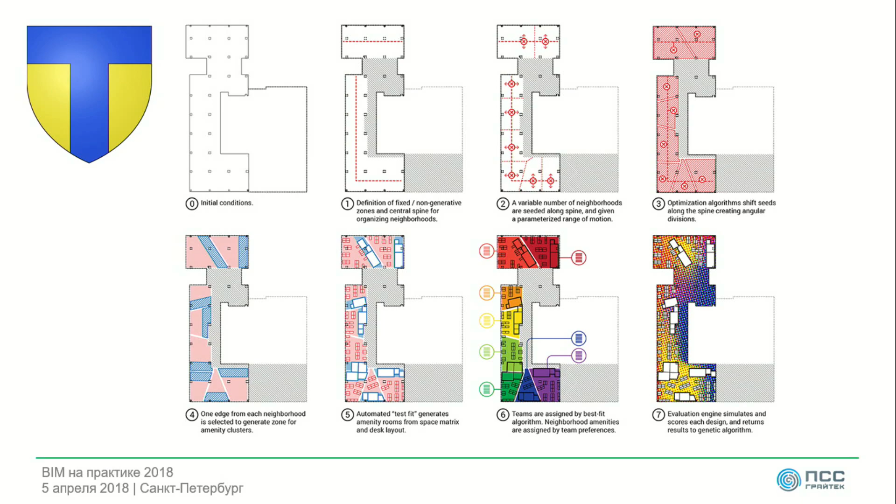Generative design is important in this context. We might have a particular company in Toronto using Autodesk. They use the software to plan the layout of spaces, and they take into account various factors.

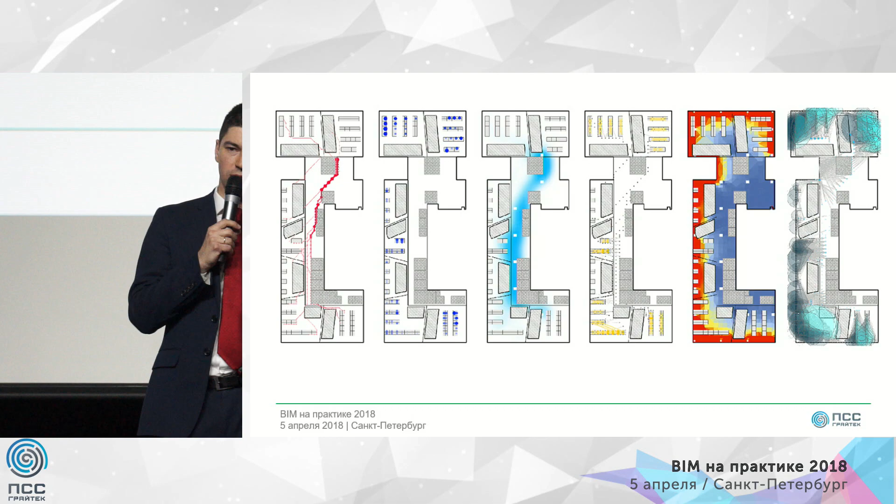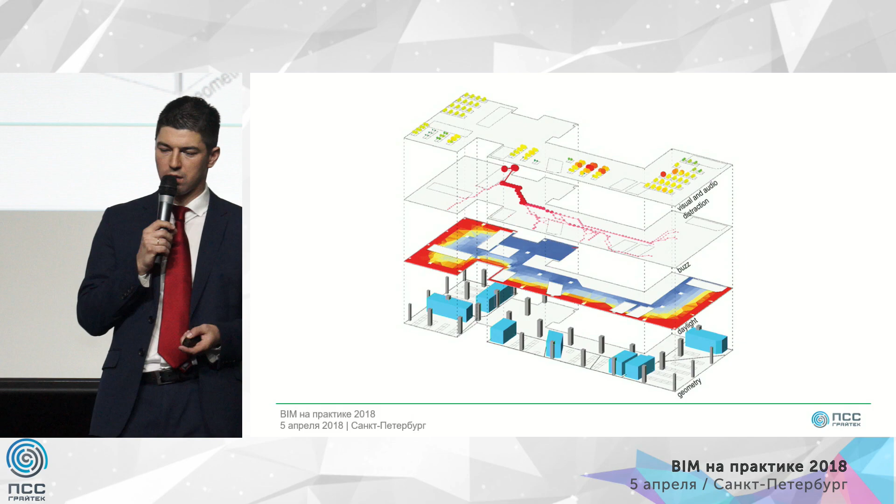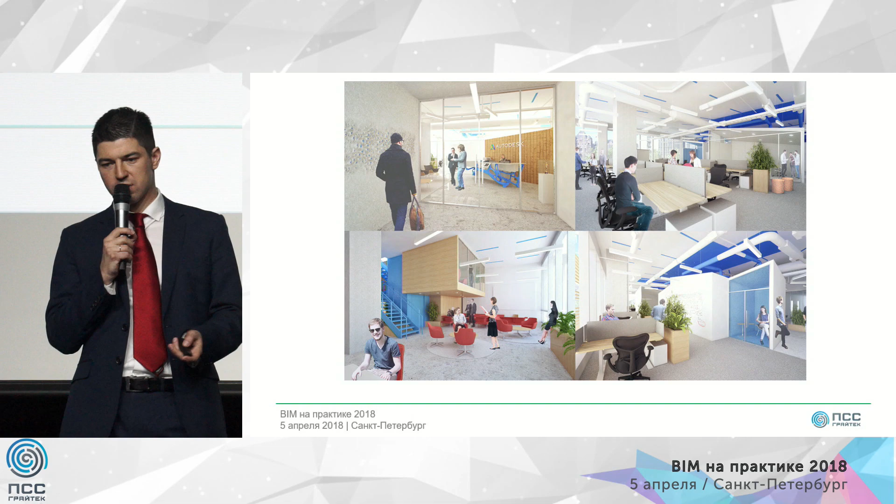To do this: the noise level, the level of lighting, traffic of people, location of people next to each other. So they combine these factors, devised an algorithm implemented by a computer, and the machine selected several thousand options and variants on how this could be addressed. After that, the best scenarios were selected, and in this slide you see a real office that was planned based on the results of this modeling.

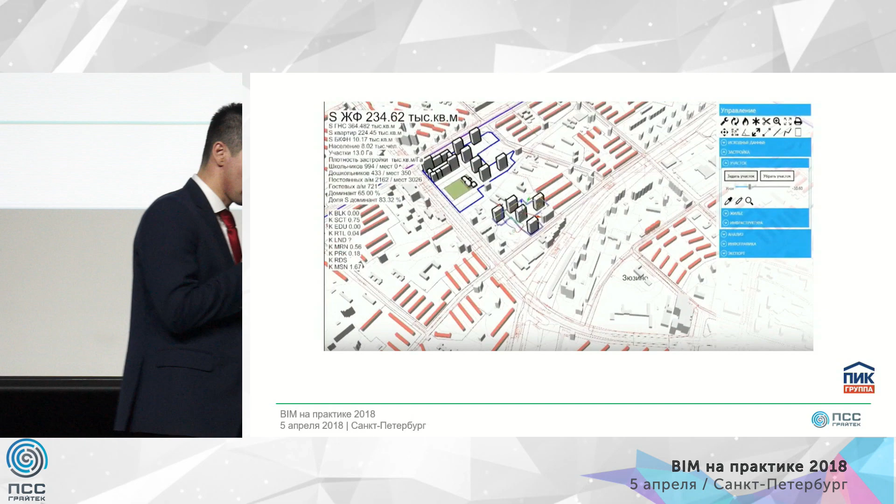In Russia, many think that BIM is not quite well developed, unlike in Great Britain, France and other countries. But in reality, in Russia we do have some very good companies in this field as well. Very often there will be an international contest of projects from our company, and I invite all of you to take part. I really think that many companies have good chances to win this contest.

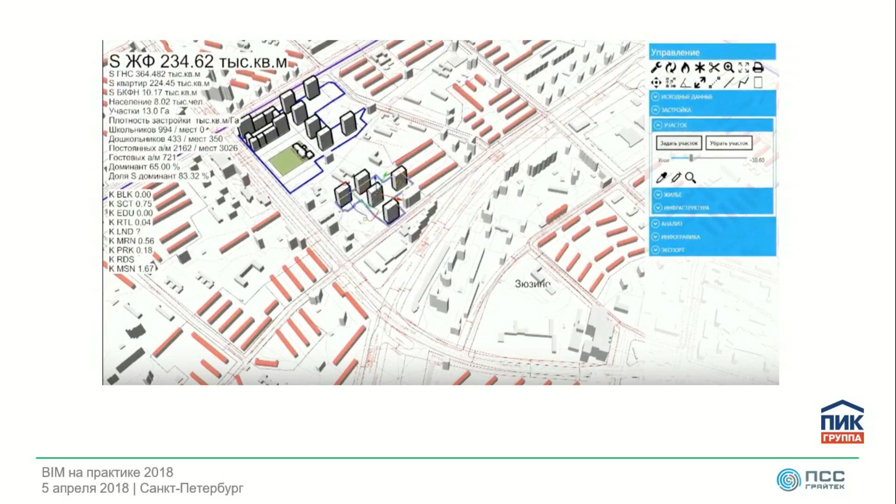In this slide, there is another very good example produced by PIK company. It helps eliminate human labor at the project stage, at the concept stage. After such modeling, designers get automatic models at the concept phase with the necessary detailing, and they can use them in their further work. This video is also available online on YouTube, and you can watch it to understand the procedure.

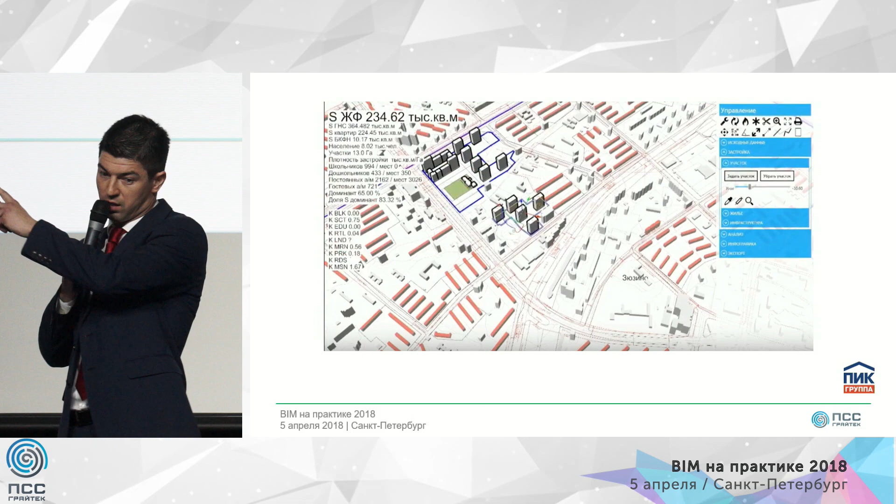There are also time and money savings, and this is a real block, a real district inside Moscow.

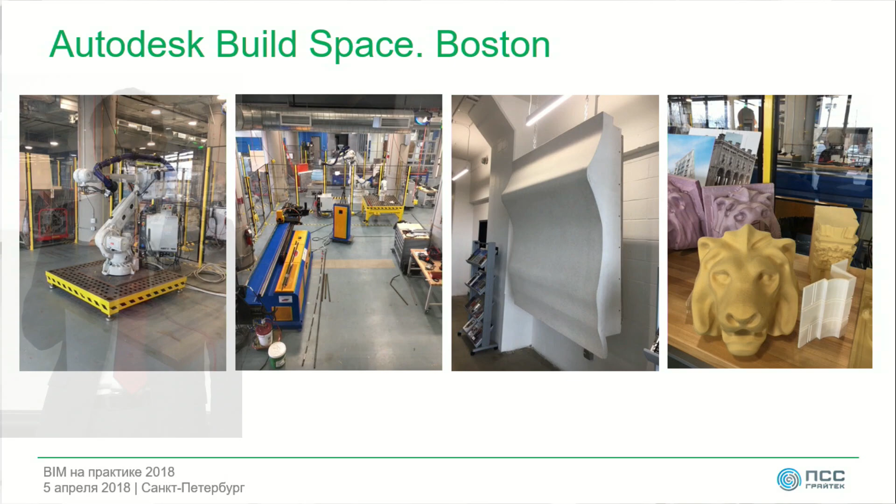I'd also like to tell you that there is an Autodesk build space located in Boston. This is the only facility in the world that has a number of robots, industrial 3D printers, and other types of equipment. All this equipment can be used for free to produce and make typical products or typical elements for construction.

So it's a site, a facility where you can test innovations in construction. This is not about machine building and mechanical engineering. If we meet after my presentation, I can tell you more on how you can get there and have access to this facility.

My advice on further steps: you can learn more about the possibilities and features of the Autodesk Dynamo product. You can use the Autodesk product that you have to access more features. Risk reduction.

In many presentations today, we have already heard about a number of products, for example the Autodesk BIM 360 Field. Such products can be adjusted, and there are different configurations possible. In this slide you see a snapshot of Field, which has rich administrative functionality, allowing you to enter many companies within one project. So you only have access to your particular area, and you can work within your area of the project and environment. Of course this might not be quite convenient, and it can probably face some security or representational issues - it's probably not the most convenient tool to use. We also have a product titled Insight.

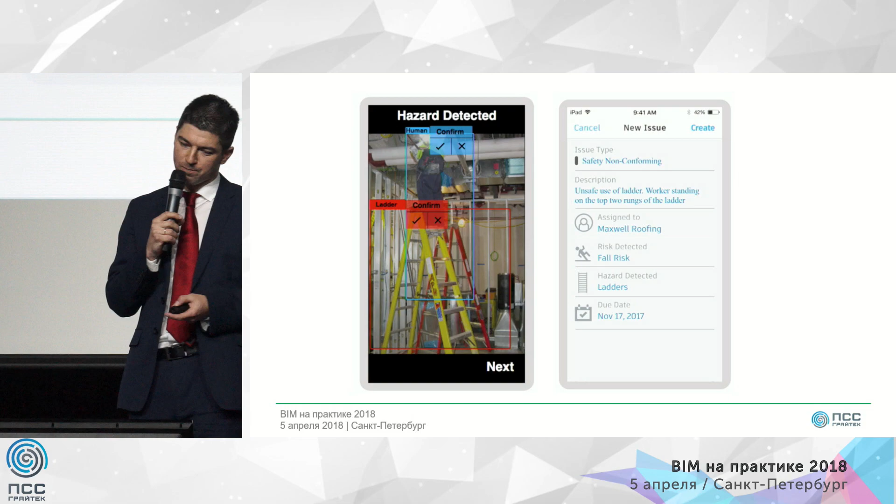This is how it might look in the future. Probably in two to three years we might already have a product that lets you just put your smartphone in front of an object and understand the level of safety.

Why is this happening? The Forge platform that we have, the BIM 360 products, have an API interface. This API can be used to develop custom applications. These custom applications can be easily developed using the API - you can use it yourself, or your partners or integrators might do this for you.

Coming closer to the conclusion of my report, let's talk about the general picture. This picture showcases a list of procedures involved in project management. Why am I using such a scheme, such a graph? Many companies are already using such a model, and they are not using the BIM model in itself. This is a standard procedure that covers the whole process, and it is already available and used by many companies.

We've talked about AI, so how could AI influence this graph in the future? How can we derive some efficient solutions out of it? Let's move around this diagram from bottom to top. We have a project example: we go to the construction site, we find some risks and mistakes, and also some comments.

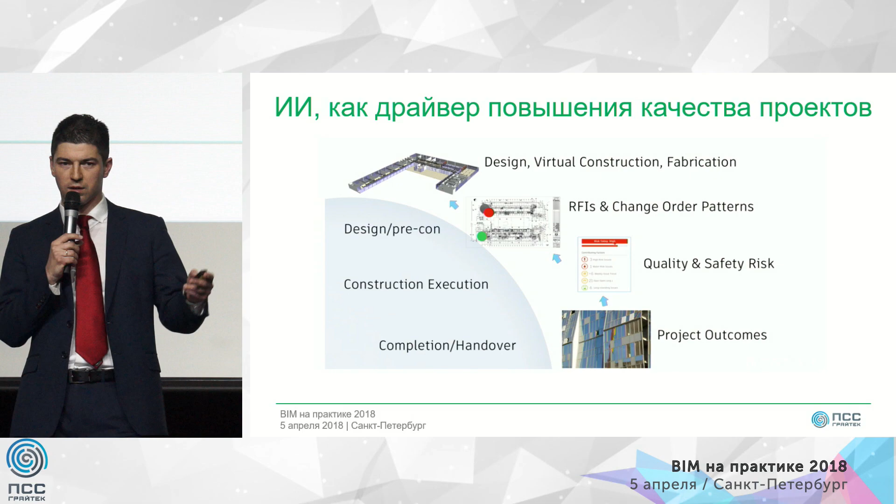After we finalize the project, we have the ready facility, so by using this structure and procedure we can understand how to improve the future product. We can formalize these approaches and transfer them up to the top, back to the designers, for them to consider collisions, to take into account various factors and options, and to understand what kind of design solutions are causing such mistakes. By doing this, we raise the level of security and the quality of design.

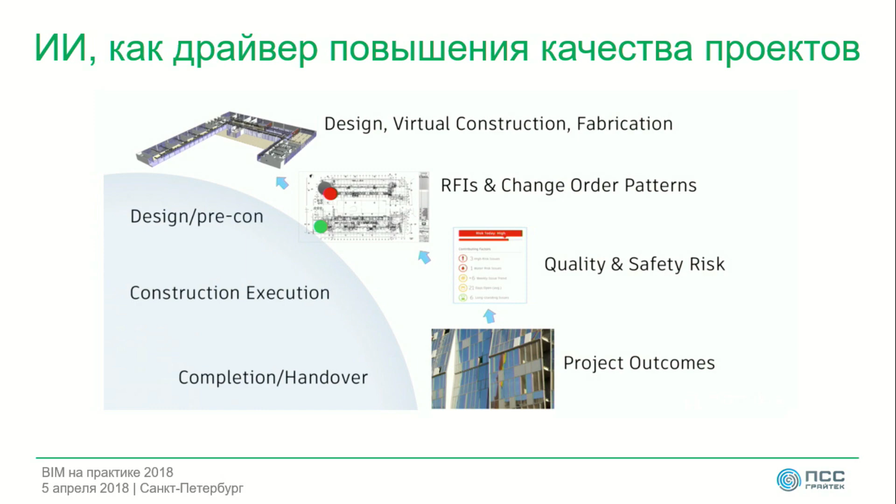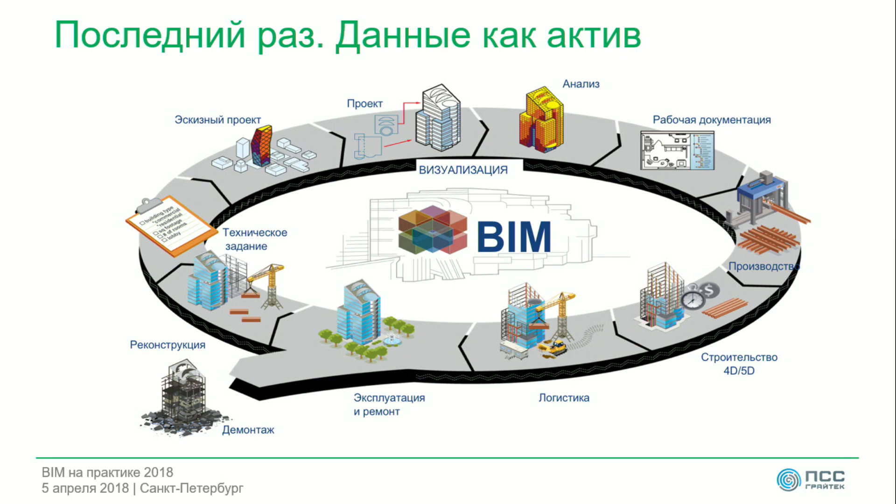I'd like to finish with the same slide. What I'd like very much to see is that BIM and innovations that you are doing in your companies right now are not just for the sake of themselves, so that you send a model to your clients and forget about it. What I'd like you to have is to use this data later on in different other projects to improve their quality, because data is an asset, and it's a very valuable asset.

I was at a conference recently in oil and gas. That's a completely different industry, and today what I heard about AI is basically the same as what people at the oil and gas conference spoke about. So the technology is the same, and unless we start doing this technology right now, like other industries do, our industry will not go anywhere. It will stay in the same place, whereas other industries will move on.

So I encourage you to use innovations and be not afraid to use them, and we will help you. We, Autodesk, will help you.